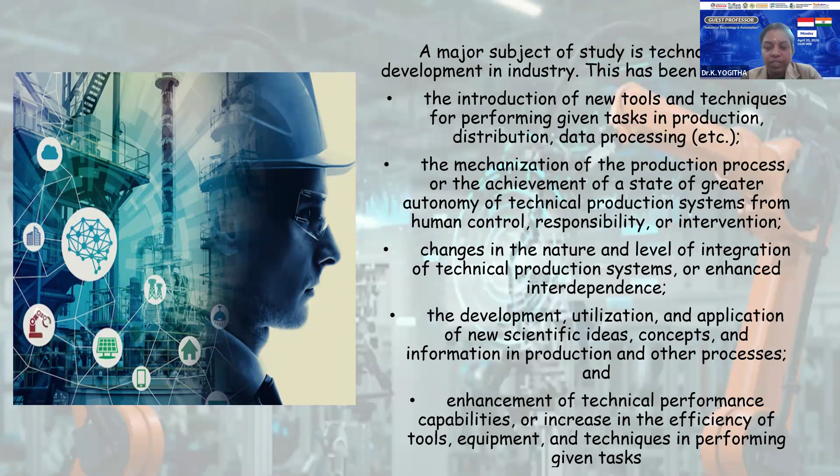The first one is industrial technology, and the second one is industrial automation. Industrial automation is nothing but any process that can be executed with less involvement of the human. That process can be called automation. Without the involvement of human needs, the process is completed—that is called automation.

In industry, automation is done in order to reduce some of the drawbacks and to make the advantage of industry needs. Industrial automation is the use of control systems, including machines, actuators, sensors, processors, and networks, to perform the task with the goal of automatic production.

In the initial stage, they used only machines—sensor, controller, and actuator—to perform automation. In the middle stage, they used the controller, and today industrial automation is a wide range of machines, actuators, sensors, processors, and networks that work to connect an industrial environment. In the middle part of industrial development, they used the sensor, controller, and actuator, along with the network—all components connected within the industrial environment to perform a specific task.

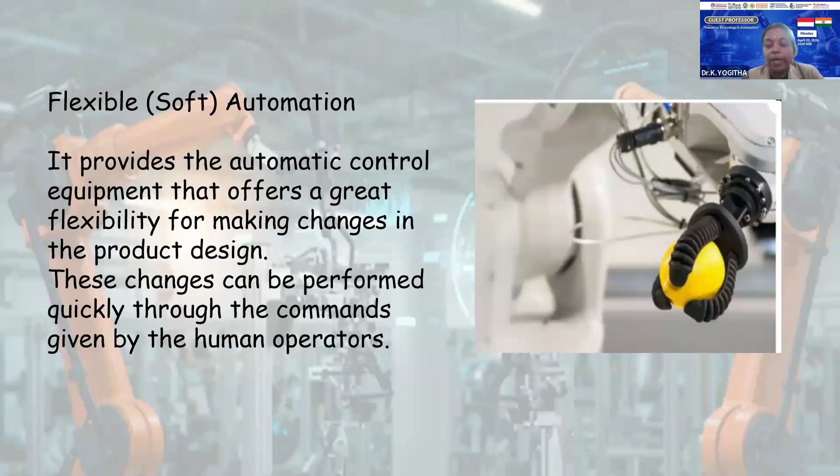First we discussed industrial technology, second we discussed industrial automation and its types, and third we go for Industry 4.0. These are the stages of development in industry, starting from Industry 1.0, then 2.0, then 3.0, and 4.0.

In the initial stage, it was used in the year 1784, later 1870, then 1969, and today we are using Industry 4.0. Industry 5.0 has also been developed, or is going to be developed.

In Industry 1.0, mechanization, steam power, and the weaving loom were used. In this process, water and steam enabled the machines to perform the particular task.

In Industry 2.0, mass production, generation of electrical energy, and the assembly line are carried out. In Industry 3.0, common components such as controllers, sensors, and actuators are used to perform the task.

Only equipment, machines, and tools are used in Industry 3.0. Nowadays, digital technology is incorporated with the manufacturing process for executing the task—that is, cyber-physical systems, the Internet of Things, and the network.

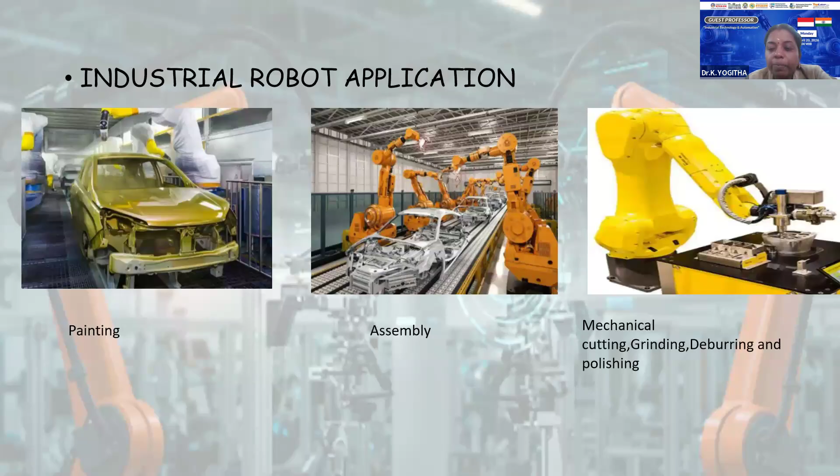And the next one is mechanical cutting, grinding, deburring, and polishing - robots are used for these. Also for gluing, adhesive sealing, and spraying material, robots are used. So here, some applications of robots in industries are mentioned: arc welding, part building, material handling, painting, assembly, mechanical cutting, grinding, deburring, polishing, gluing, adhesive sealing, and spraying materials.

There are more types of robots available nowadays. The most common robots used in industries are mentioned here. The first one is the articulated robot. Articulated robots have rotary joints and can have up to 10 or more axes. With the help of these robots, components can be easily picked and assembled wherever the product is required. This type of robot, called the articulated robot, has more than 10 or more axes.

The second one is the SCARA robot, which stands for Selective Compliance Assembly Robot Arm. These are used for assembling or picking up small components. This type of robot is used only for small components, and the design allows quick back-and-forth movement to quickly carry out and assemble the components. This makes it great for repetitive assembly line work without losing speed or accuracy, making the process very fast with no error while using this type of robot - the Selective Compliance Assembly Robot Arm, SCARA robot.

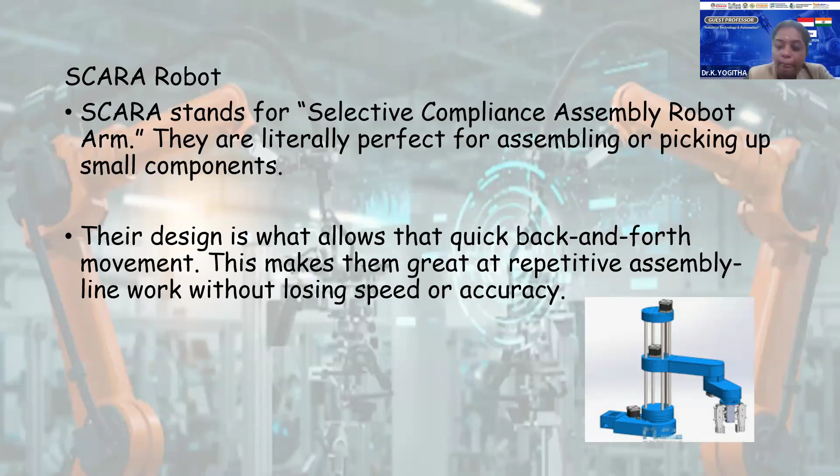And the next one is the Delta robot arm. This type of robot has a structure that looks like a spider, with 3 arms connected to the base. Delta robots are very fast and lightweight, and are mainly used in the packaging industry and food industries. Look at this structure - it looks like a spider, with all 3 arms connected at the base part. It is very fast, lightweight, and mainly used in the food and packaging industries.

The next one is Cobot robots, which are human-friendly robots. By using these types of robots, any hazardous task can be avoided. Unlike traditional robots that operate behind a safety barrier, Cobots can actually share a workspace with the worker without posing any danger.

It has sensors, of course all robots have sensors, and through the sensor it just sends the value. This robot also detects touch and stops instantly if something comes in its way.

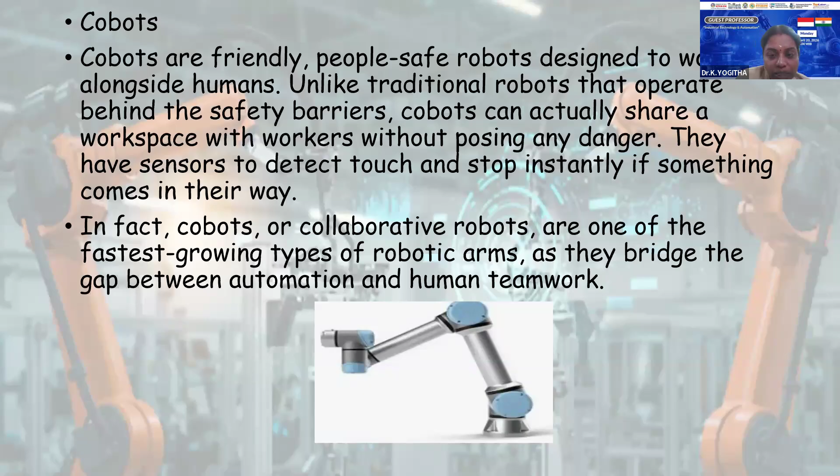The third one is Cartesian or gantry robots. As you know, Cartesian coordinates are three coordinates: x, y, z. With respect to the three-dimensional axes, it moves in a straight line: up and down, left and right, forward and backward, along the x, y, z axes. This type of robot is also called a Cartesian robot, and is used in manufacturing, food packing, and packaging industries since it moves over the three axes x, y, and z.

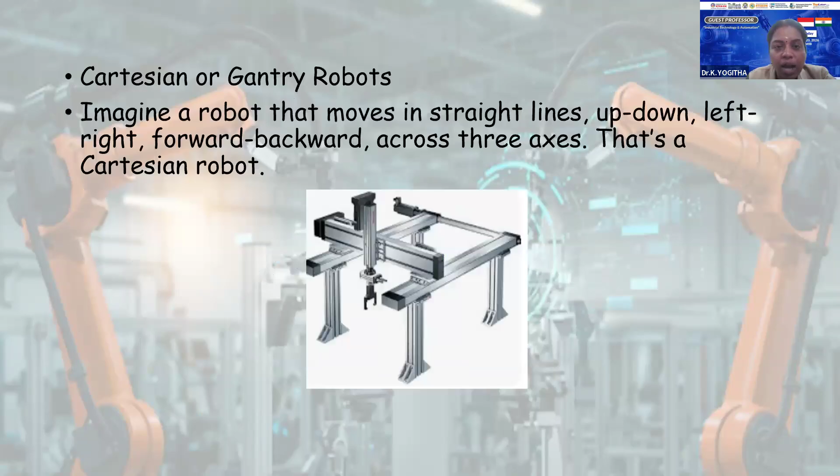So that's all about the robotic part: what is meant by robots, robotics, characteristics of robots, and the need for robotics. There are many industrial applications for using robots in industry. The next topic is types of robots, and why we select a particular type based on design structure and performance: articulated robots, SCARA robots, Delta robot arms, Cobot robots, and lastly, Cartesian or gantry robots.

Next we go to control systems, which are the heart of the automation process. The basic components in control systems are the sensor, the controller, and the output unit, which is nothing but the final control element. The sensor senses the value.

For example, it may sense the temperature, pressure, or humidity level of the concerned process, and whatever value is sensed is passed to the controller. It also senses incoming signals, sending input values to the process, checking whether materials are correctly received or not, to make sure the process can manufacture correctly. This can be measured and sensed by the sensor.

In the controller part, which is the main part, we can use PLC or DCS, that is, a programmable logic controller or distributed control system, in industries to take action based on the input value and make decisions. Based on the output of the controller, it goes to the output device, that is the final control element, through which the signal can be received by the control boards. This is the basic process of control systems.

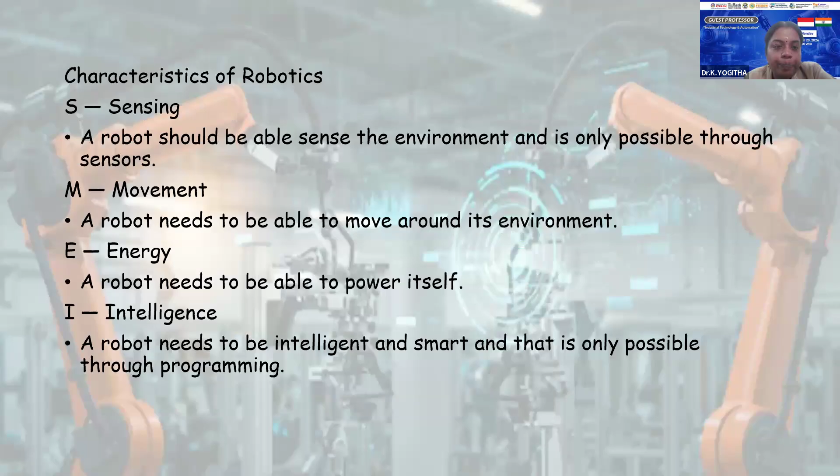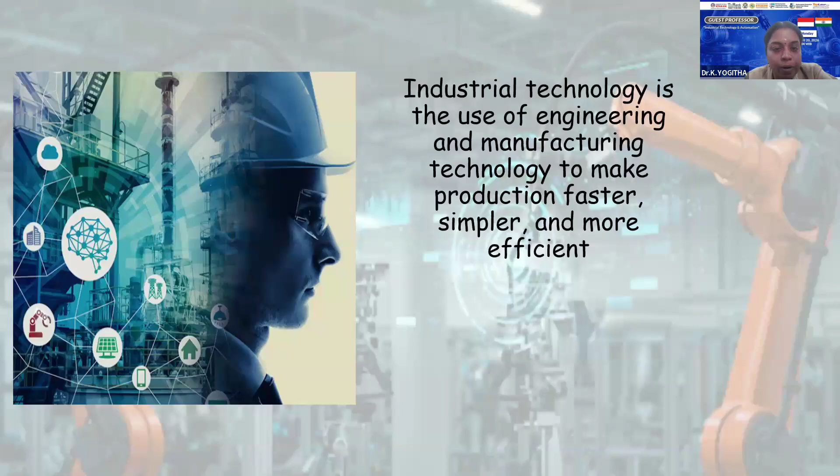Okay, so just a short recall of today's topic in 2 minutes. The first one is industrial technology. In industrial technology, only with the help of a set of rules and machines can the process be carried out. So what are the things which can be included in the industry?

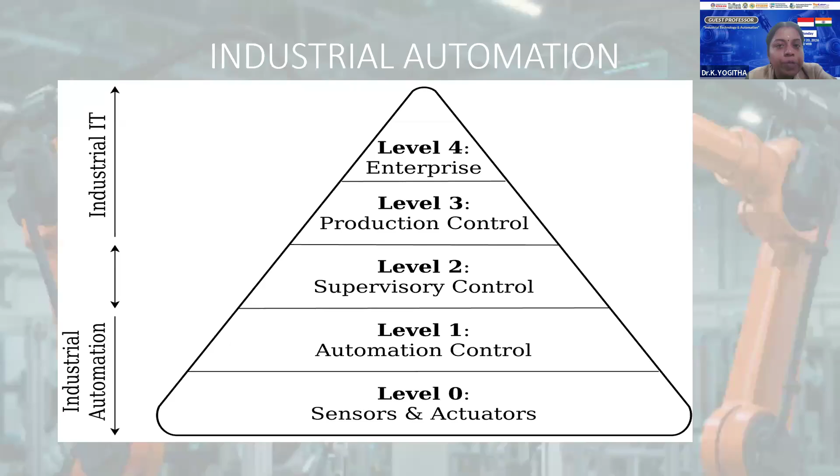Everything that can be included in the industry. The second one is industrial automation. Here, the controller, sensor, actuators, or any processes can be used in the initial stage. Later, we can use advanced technology also in industrial automation. There are 5 levels of industrial automation, starting from level 0 to level 4.

The next one is types of industrial automation: fixed or hard automation, programmable automation, and then soft automation—for repeated action, to change the consent task, and to change specific components. Here flexible equipment is used, for different types of industrial automation, and then different stages of development of industries.

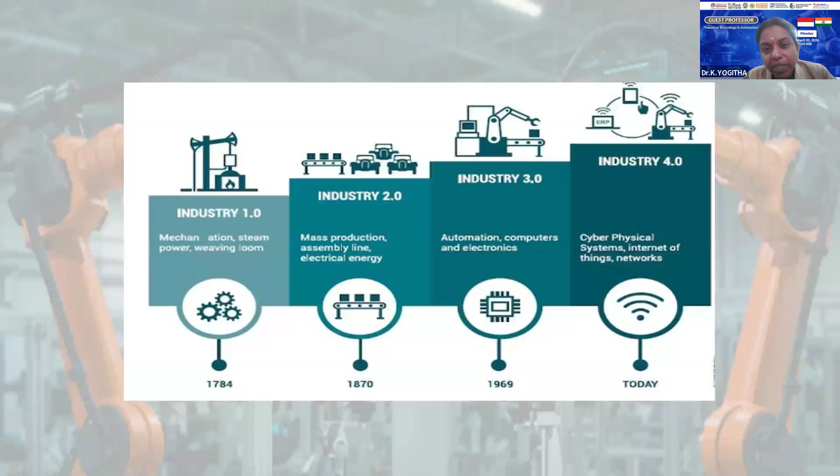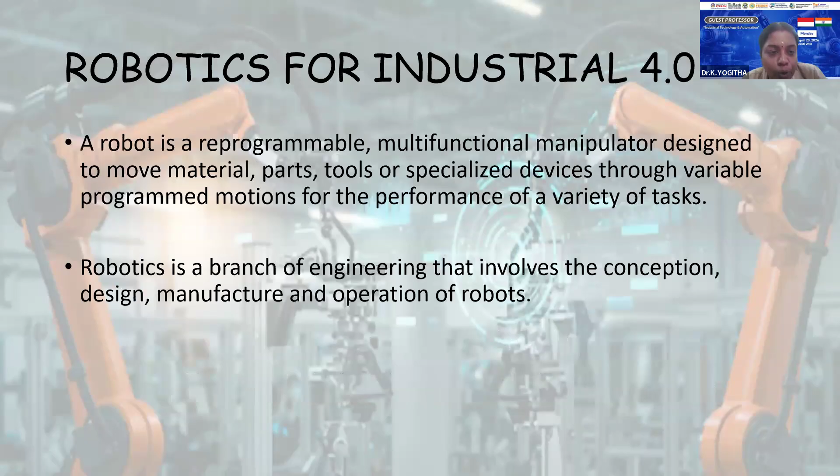Industry 1.0, 2.0, 3.0, and then 4.0. And the next one is what is Industry 4.0 and its benefits. Afterwards, robotics and control systems in Industry 4.0—what is meant by robots, robotics, and its characteristics.

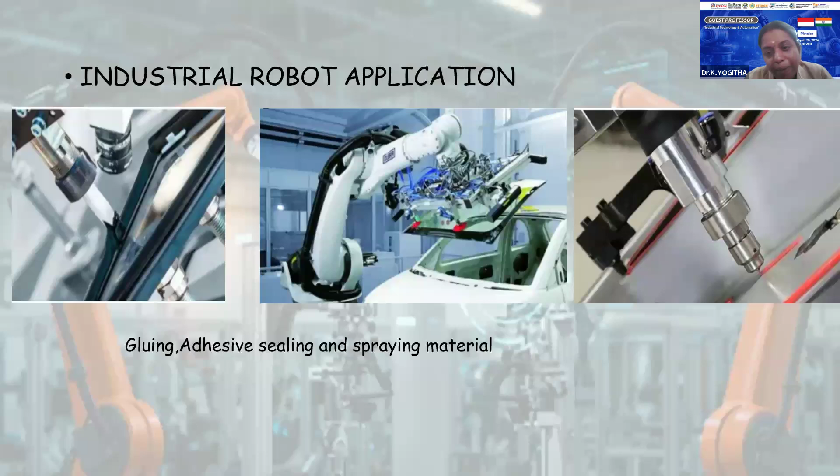Afterwards, different applications of robots in the industry. So what is the need to use robots in industries? These are the main applications of robots in the industry, and then its types.

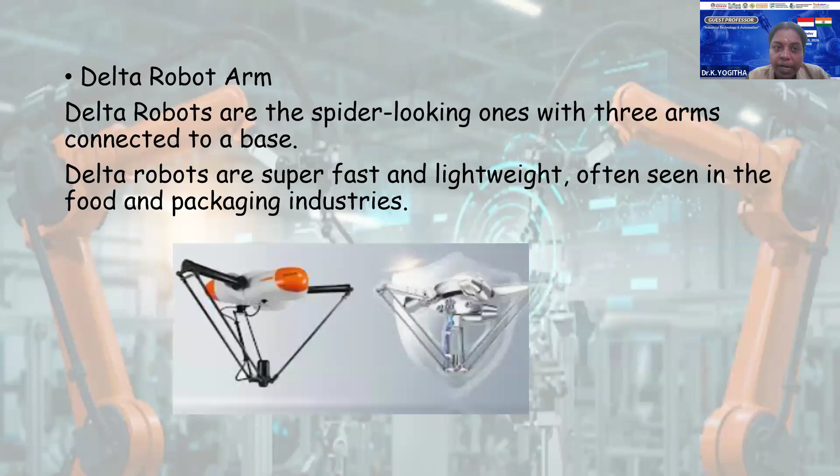So there are 4 types of robots mentioned. The first one is articulated robots, SCARA robots, Delta robot arm, and then the cobots, Cartesian robots.

And then what is the control system? Control systems are of 2 types: open loop and closed loop. Open loop is nothing but the controller sending commands to the final stage, whereas in closed loop, the process continually goes on until the consent output is achieved.

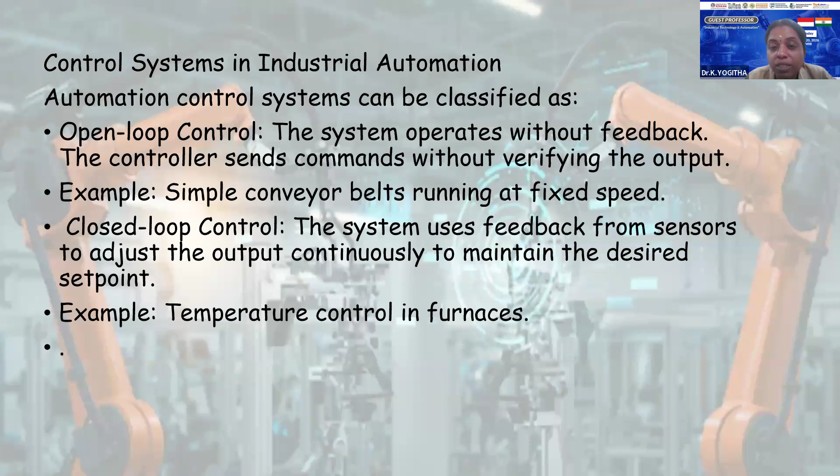And the next one is controller in the automated systems. So what is the need of a controller, and what are the types of controller? PLC, DCS, SCADA.

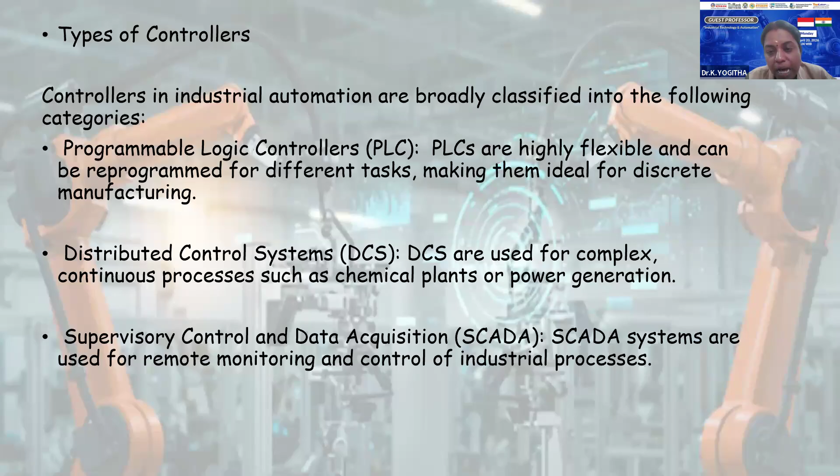For reprogramming, for complex tasks, for remote monitoring, these controllers are used, and then its functions. It acts not only as a controller but also as signal amplification, logic execution, and for communication and data handling. And then its applications.

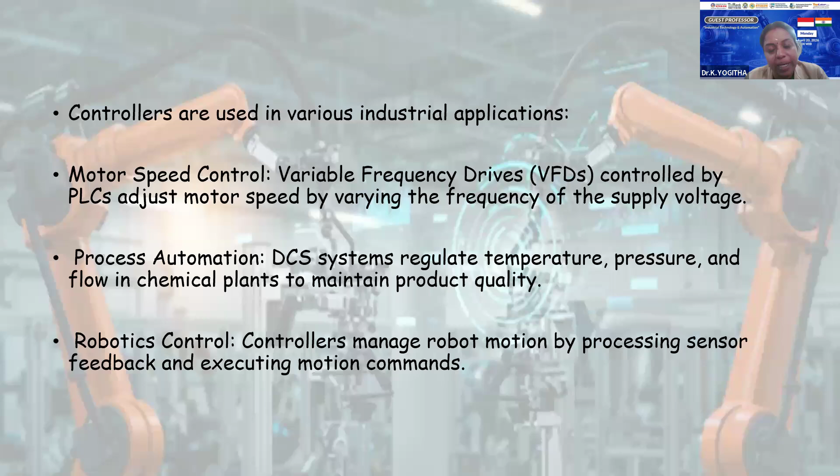Yes, thank you. Any questions?

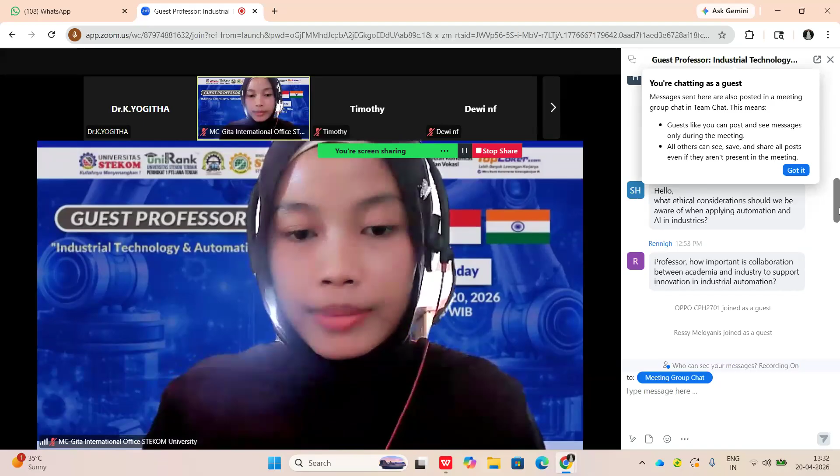This is a very interesting question. Innovations are developed, the concept is developed day by day. Whenever we work on the process, we get new ideas to develop the product, and only when we work on the process do we get another set of ideas. So students should visit the industries to review the product, to verify whether it meets the customer's needs or not. They should go and visit the industries.

Industry 5.0, this is the emerging technology. The next question is, what emerging technologies do you believe will shape the future of industrial automation in the next few years? Industry 5.0 technologies along with the involvement of humans.

Sensors are nothing but, there is a difference between the sensor and the transmitter. Based on the process, the sensor can be used wherever needed at each stage of the process. There may be a difference - the transmitter just sends the signal, while the sensor senses the value. So whatever input can be transmitted through the transmitter, the sensor just senses it and then sends the value to the next stage.